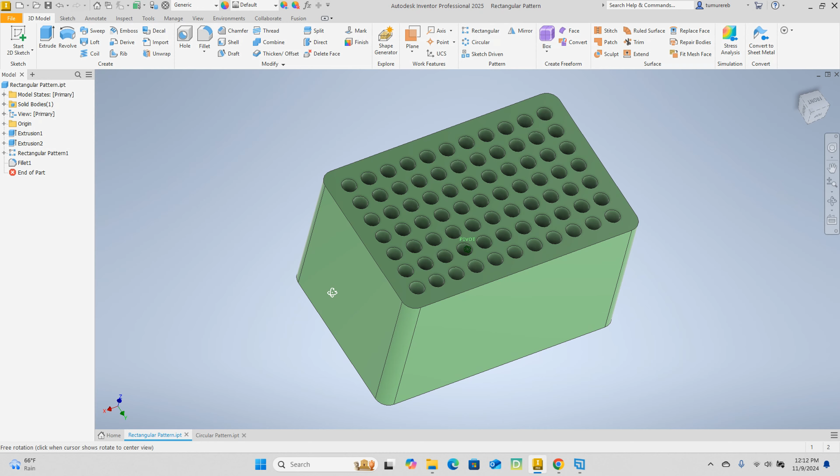In this exercise, we are exploring the applications of Extrude and Pattern Commands in Autodesk Inventor by creating this simple pencil holder. The tutorial is designed for beginners and I will go as slowly as possible to make it easy to follow along. If you are an advanced user, feel free to pause the video and try making the pencil holder on your own.

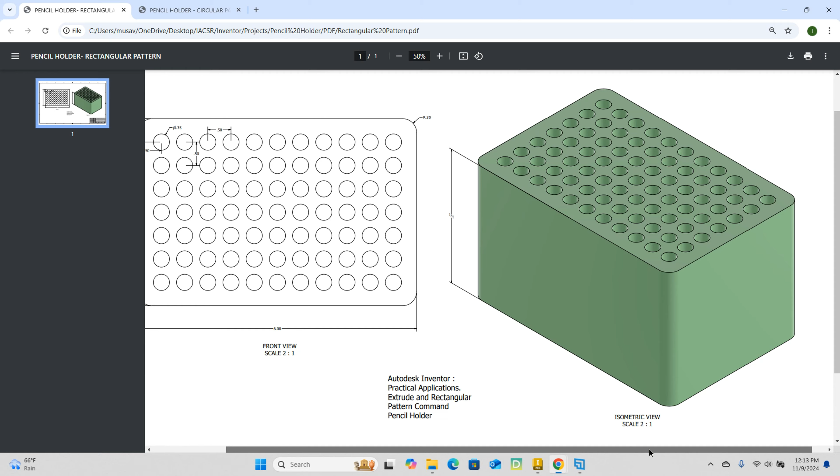Otherwise, follow along with me step by step. These are the dimensions. Later in the course, I will show you how to create these 2D drawings. Zoom in a little bit. Alright, go ahead and take a picture and try to make this on your own.

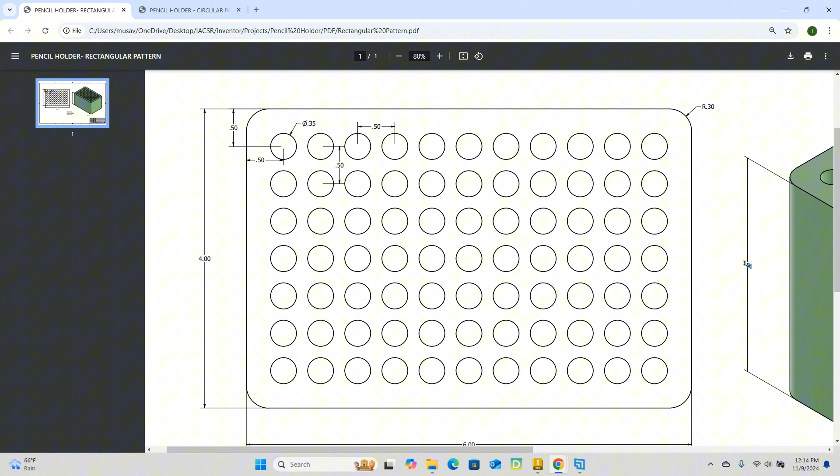As you can see, the length of this pencil holder is going to be 6 inches and the width is 4 inches. And then we have these round edges, and the radius for that is 0.3 inches. Overall height is 1.5 inches. Alright, now let's go ahead and get started.

Go to File, select New. We're going to be working in inches, so go ahead, expand this and just select English, Standard, IPT, and then Create.

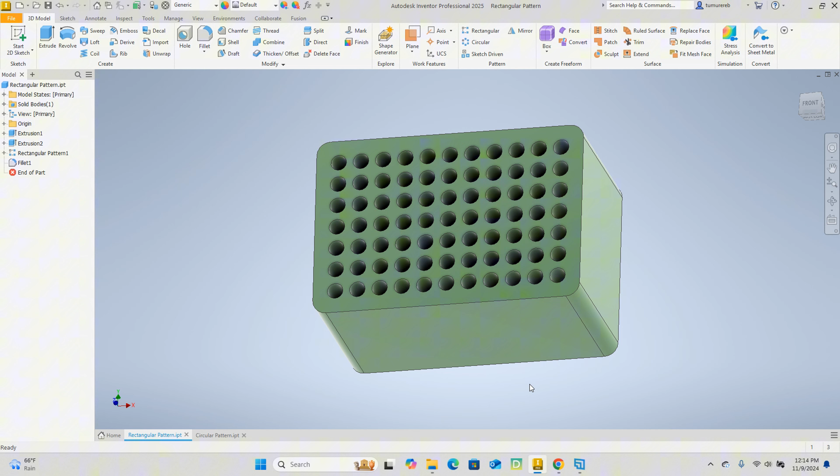Start a 2D sketch. Which plane do we want to use? Does it really matter? Go ahead, start with the XZ plane right now.

We're gonna go to the rectangle command, 2-point center. The origin is where the X and Y coordinates are 0. So just left click and move to your right or your left.

Now we need to put in the dimensions. The width is going to be 4 inches. So whatever that highlighted text is, go ahead and enter 4, then hit the tab key to go to the other side, and that side is going to be 6 inches. Enter.

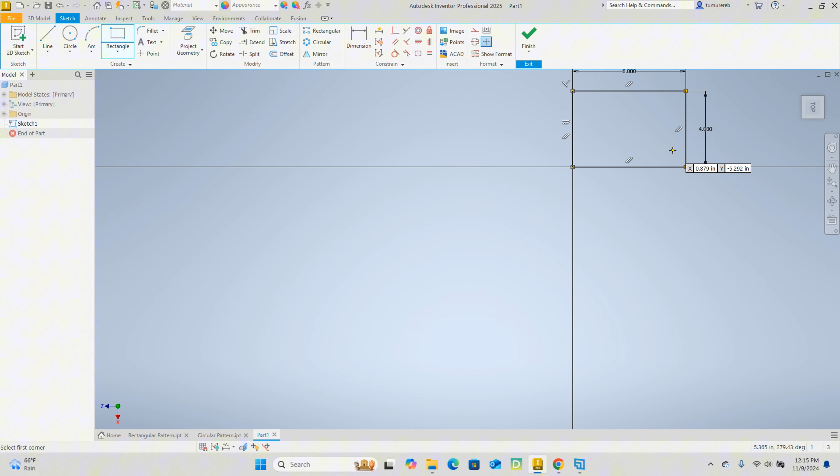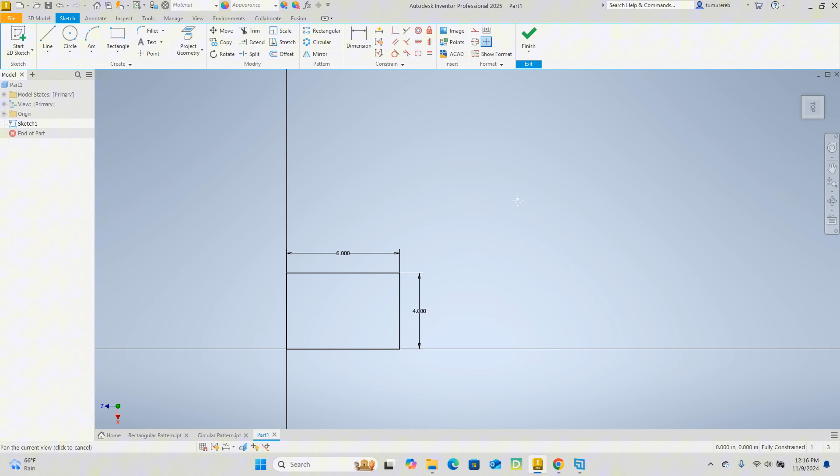Alright, now right click and click OK to exit the rectangle command. If you press and hold your wheel button, you get a pan mode that allows you to move anywhere you want on the screen so you have more room to work with. If you drag back and forth with your wheel button, you can zoom in and zoom out.

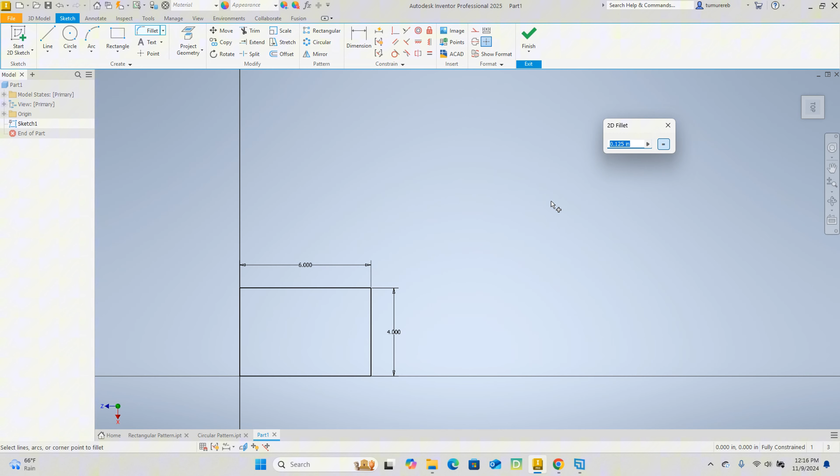Okay, now launch the fillet command. What's the radius? 0.3. Now go ahead, select this side, this, and that. Make sure each corner is rounded. Right click, again click OK, or press the escape key on your keyboard.

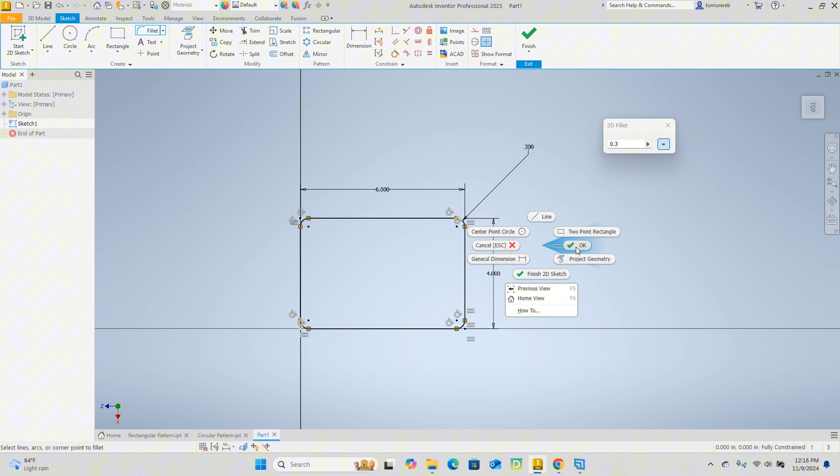Does the same thing. Finish your sketch, top right corner. Move down a little, press your wheel button and hold and move down. Now we are ready to extrude it. Extrude is the first command in the 3D model.

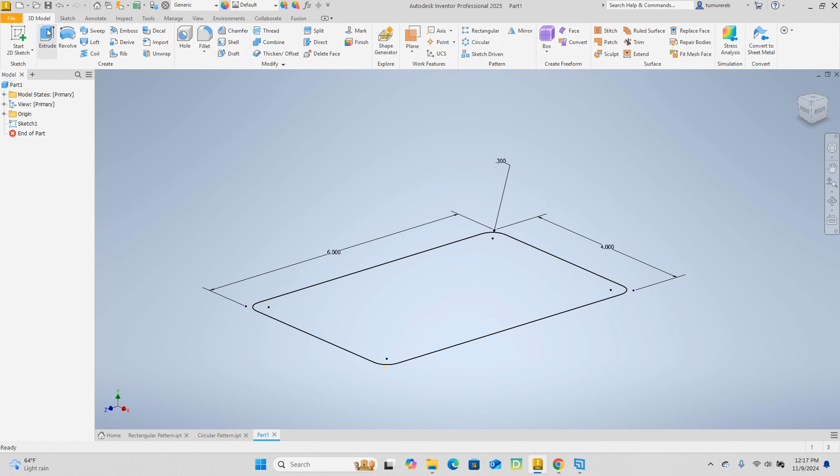That's probably the most used command in Autodesk Inventor. So extrude, launch the command. What is the height? The height of our pencil holder is going to be 3.5. And click OK.

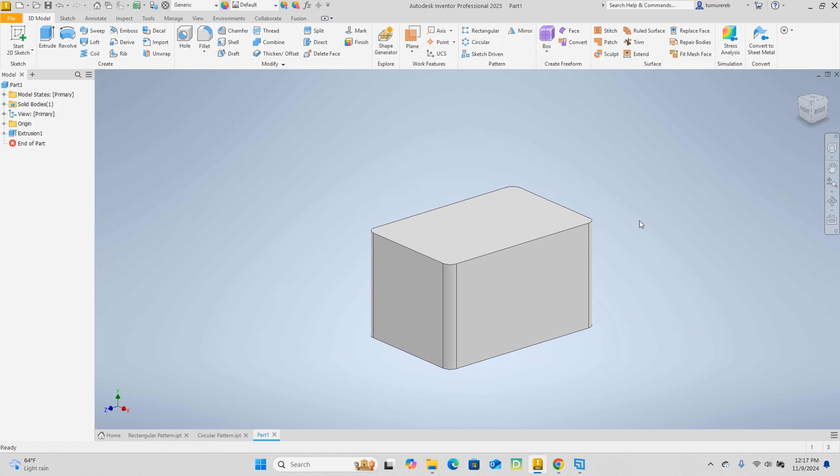Alright, so now select this top face. When you do that, Autodesk Inventor gives you multiple options. One of them says Edit Extrude. Let's say we made a mistake and we entered a wrong height. Let's say it was supposed to be 5.

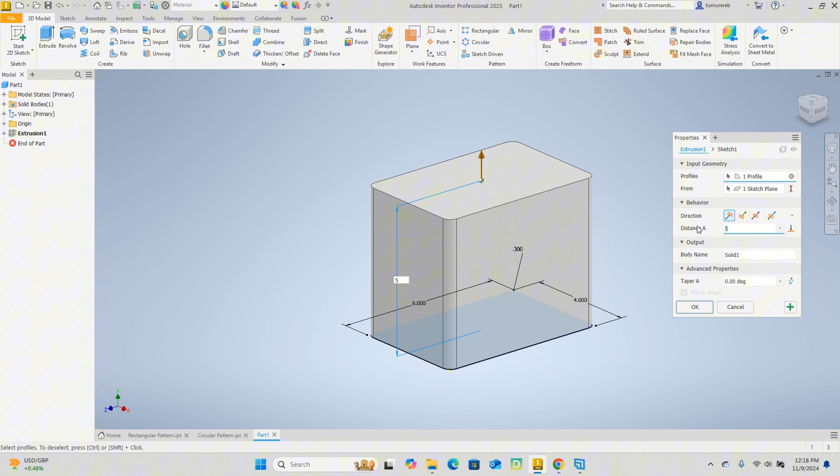You don't have to start over. You can just edit the extrude and change it to 5. See how it changes to 5 now? Alright, I'm just gonna keep it back to what it was. I want to show you that in case you made a mistake, you don't have to start over from scratch. You can just edit your extrude.

You can also edit your sketch if your dimensions change. If you're making this part for somebody and they say, hey, I want the width to be 4 inches and the length I want it to be 8, you can just change that to 8 and you don't have to start a new drawing.

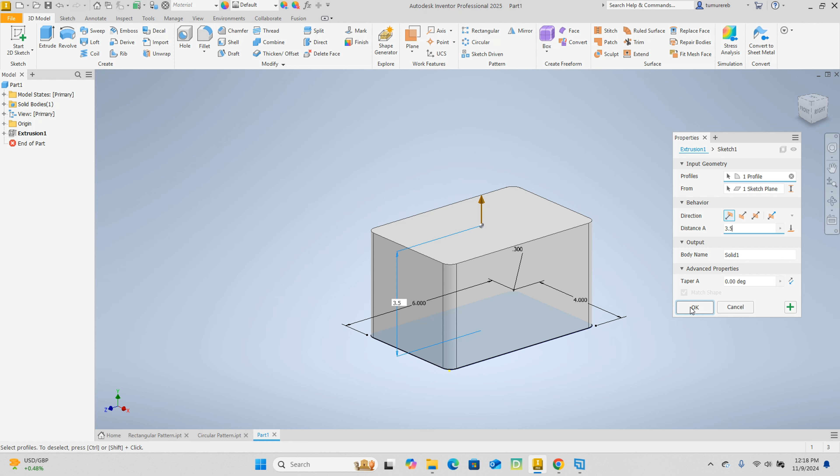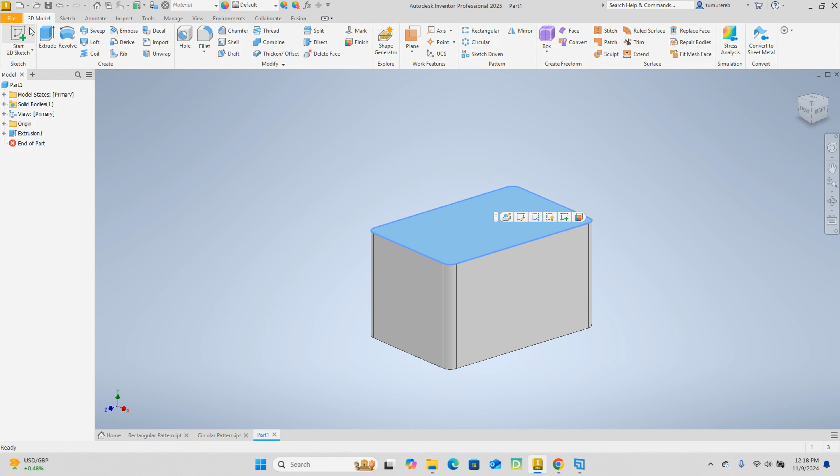Okay, so go back, left click, and this time we're going to look at the second-to-last option that says Create Sketch. This is going to allow you to create a sketch on top of this face. You can also go to 2D sketch and it will do the same thing.

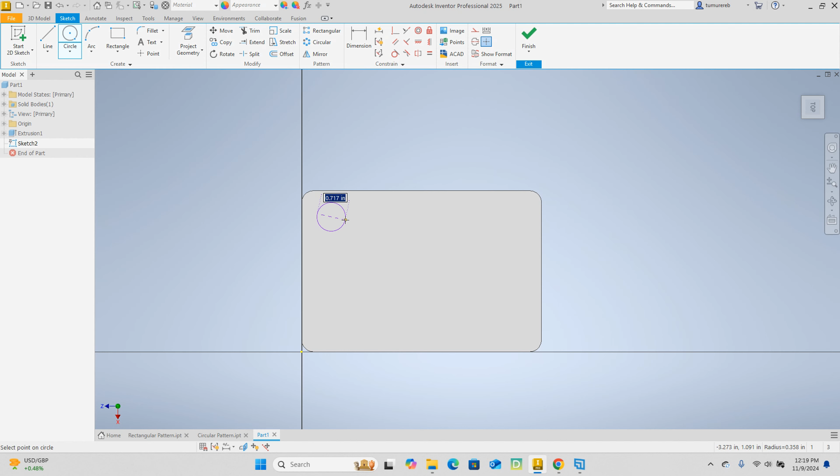It's just a matter of preference. One is faster, definitely, sometimes when time matters. Alright, so now we're going to select the circle command, and we're gonna draw another circle about this point. What's the diameter of this circle? Let's do 0.35, and that's going to be the hole for the pencil.

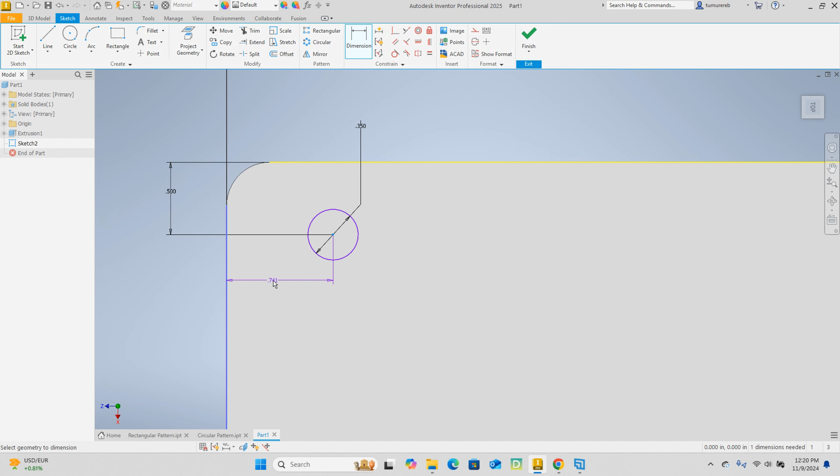Alright, we need the distance from the center of this to this edge to be 0.5. We also need this distance to here to be the same, 0.5. Alright, finish your sketch.

Extrude. Alright, now do we want to cut or do we want to join? Second option, cut. What's the distance? Let's do 3 inches.

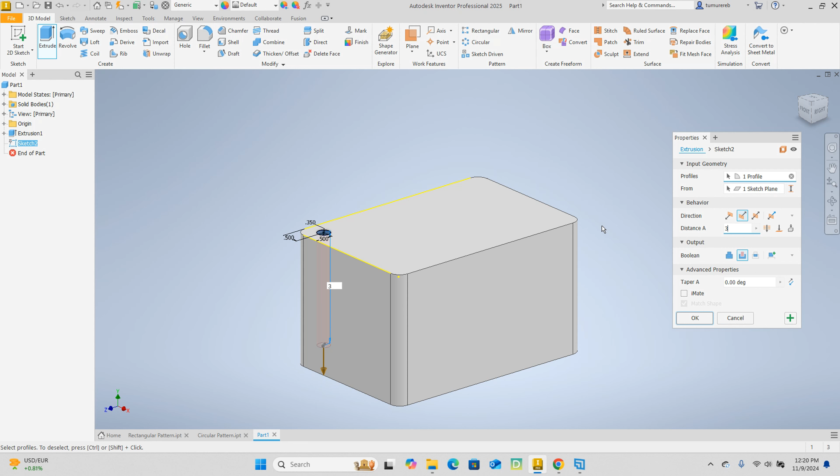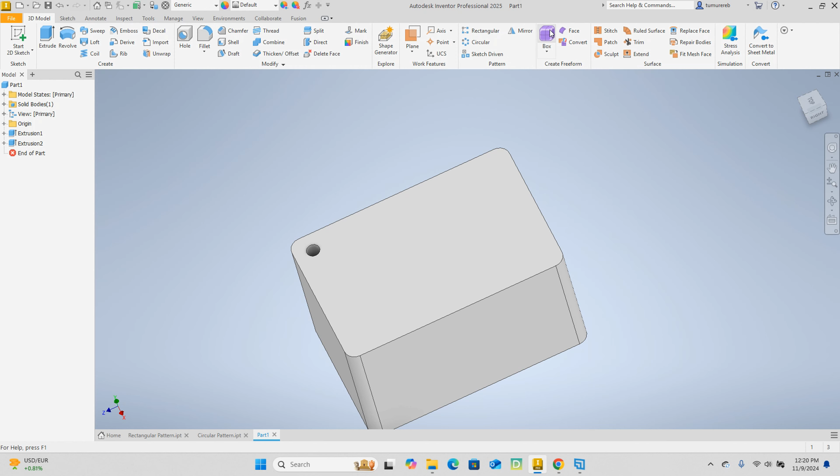Alright, so we got one pencil hole. Now we need to make multiple copies, and to do that, let's use our rectangular pattern. Rectangular pattern is next to the left of this purple box in the pattern panel.

So when you launch the command, the first thing it's going to ask you is to select the feature. The feature is going to be extrusion number 2. Notice now that it's highlighted, that means we selected it, and the arrow went from red to white.

Now we need to give a direction. So select direction 1, select that arrow, and then go ahead and select this edge. It gives you a preview of what it's going to look like. We don't want it going this side, so we want it to flip over.

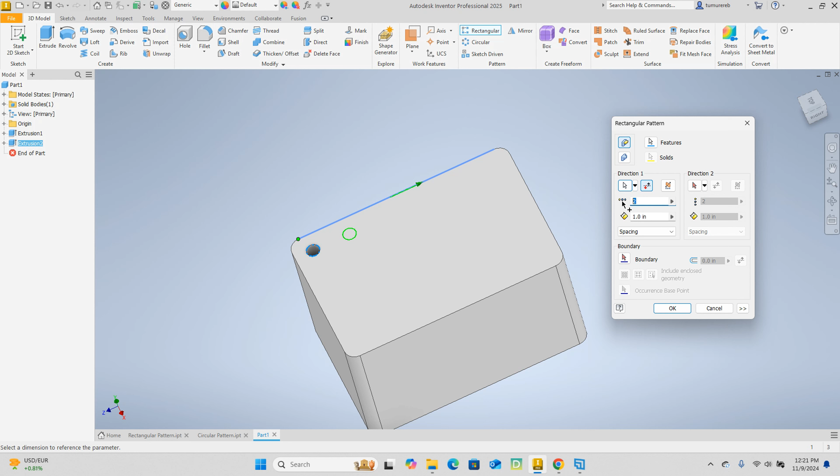And how many do we need? Let's do 11 of them. It gives you a nice preview. What's the space between them? 0.5 is fine. Alright, so that's done.

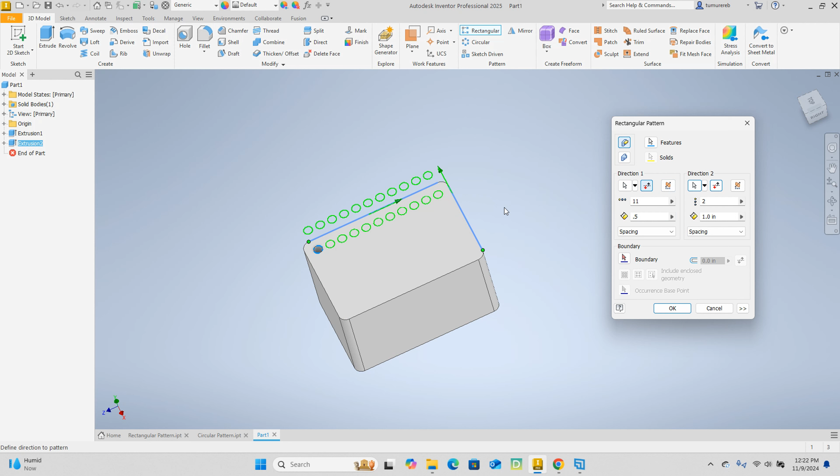So we're gonna make multiple rows over. Move to direction 2. Select this edge, flip it. How many? 7. Inventor is like, hey, you may crash your computer. This is too many—if you do like 1,000, definitely you'll crash it. So go ahead and do 7, that's fine. Just click OK.

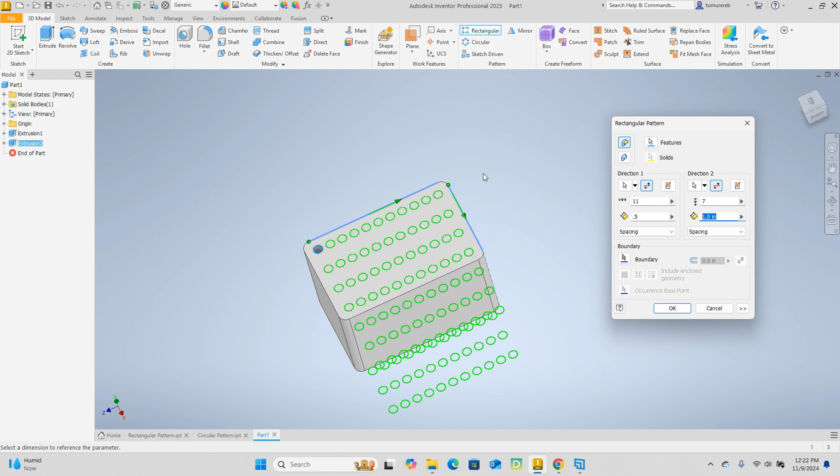Space between them is what? 0.5. And that's a nice preview of how it's gonna look. So click OK.

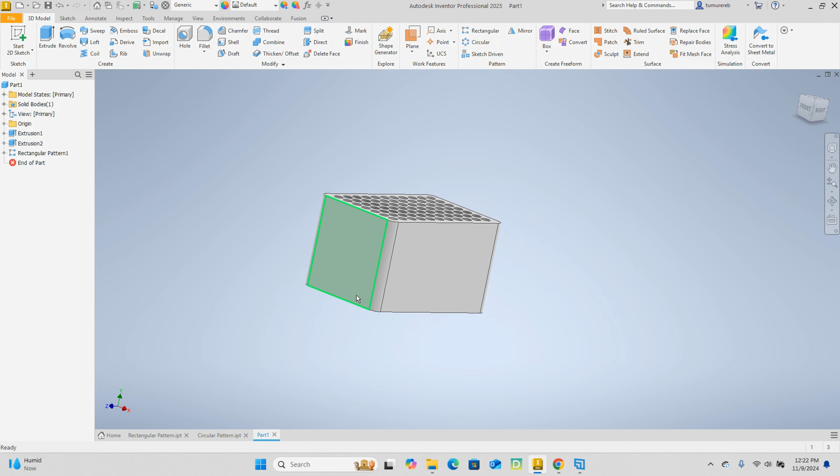Alright, we are almost done. The last thing we need to do, let's go ahead and make it look pretty. Change the appearance—show your creativity.

Alright, so we're gonna go to the top, whatever that default is, under that drop down. We have a list of different materials we can choose from. I am in the Inventor material library. That is also Autodesk appearance library—so many options.

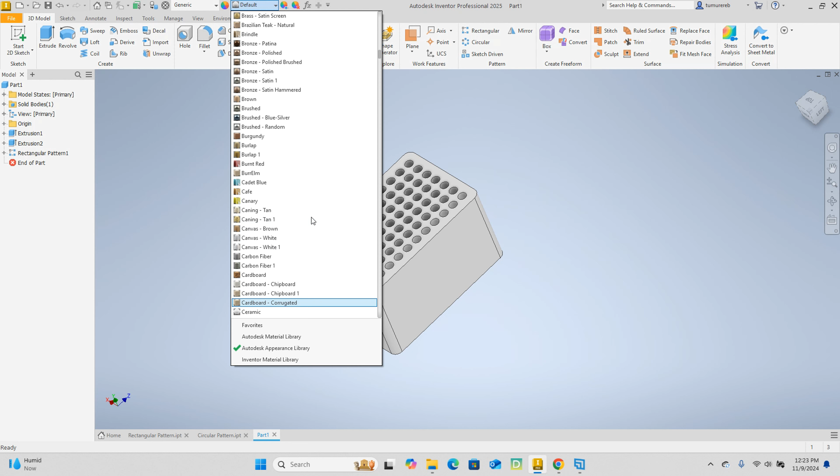Go ahead and just play with it, find whichever material or color that you want to use. It's entirely up to you. I'm gonna find dark green here. Alright, that looks good.

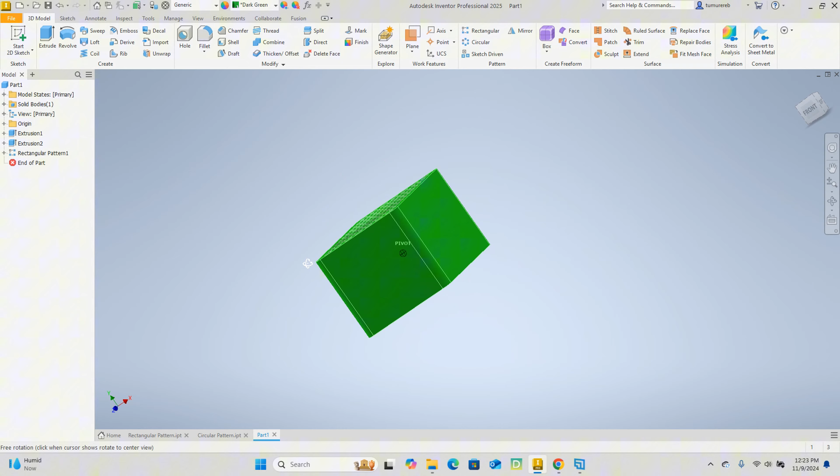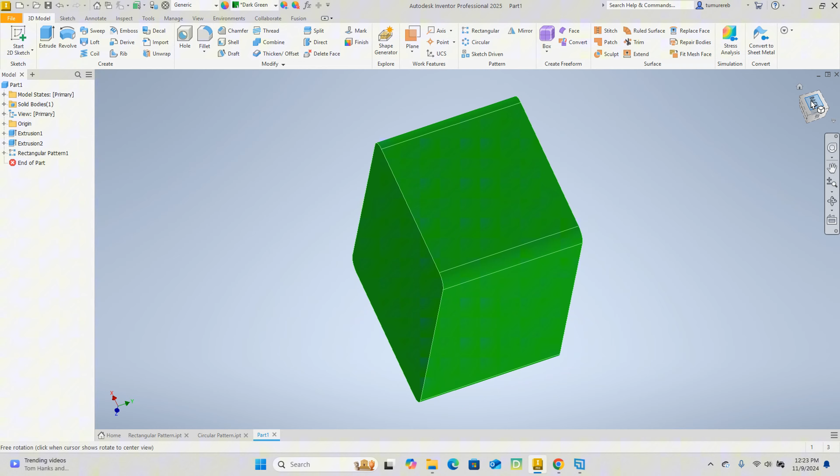Shift and the wheel button is going to allow you to rotate like this—you're gonna see different views. If you don't want to do that, go ahead and use the view cube. You can use this view cube to see different sides, like the bottom or the back. It does the same thing, but I prefer shift and wheel button—it's fast, especially when you have multiple parts. And remember, if you press and hold, you can just move your part anywhere you want.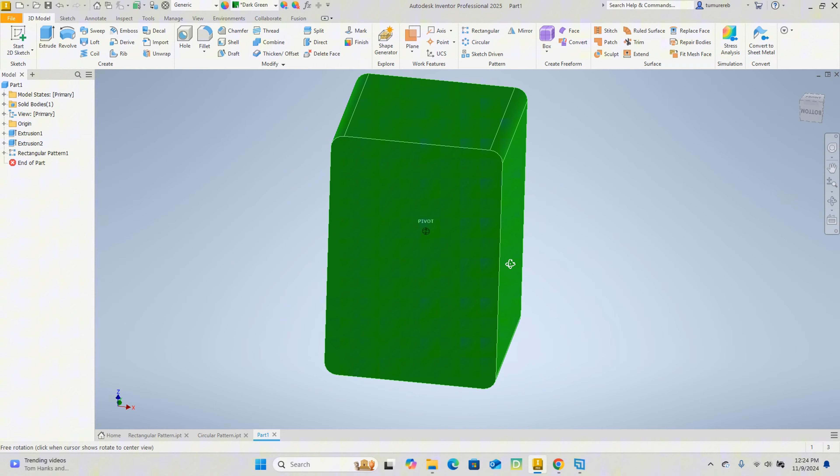Green. Alright. Concludes—actually, one more thing.

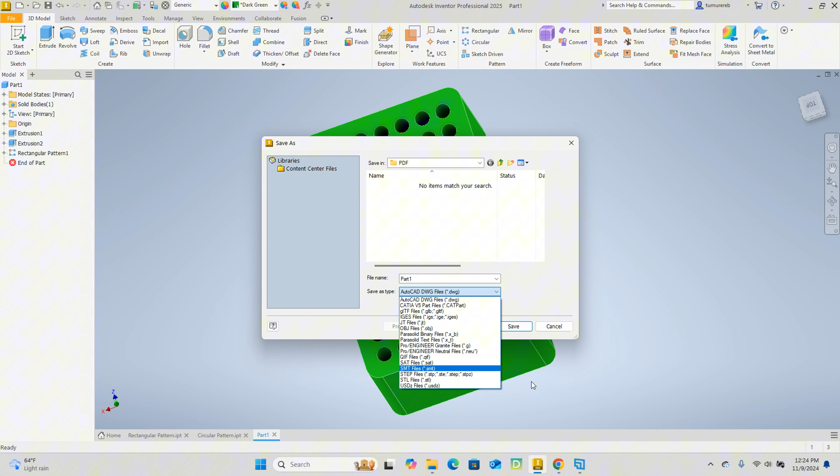So let's say you would like to print this for your friend or your favorite teacher. Let me show you how you can export the file for 3D printing. You're gonna go to File, Export, CAD Format, and we need the file type to be STL file. Most 3D printers accept, most 3D printer slicers accept STL files. So you're gonna go to your 3D printer slicer and build it. Make sure you select STL file if you want to print it.

Okay, I'm gonna cancel that. Alright, that concludes exercise 1, part A, extrude and pattern commands.

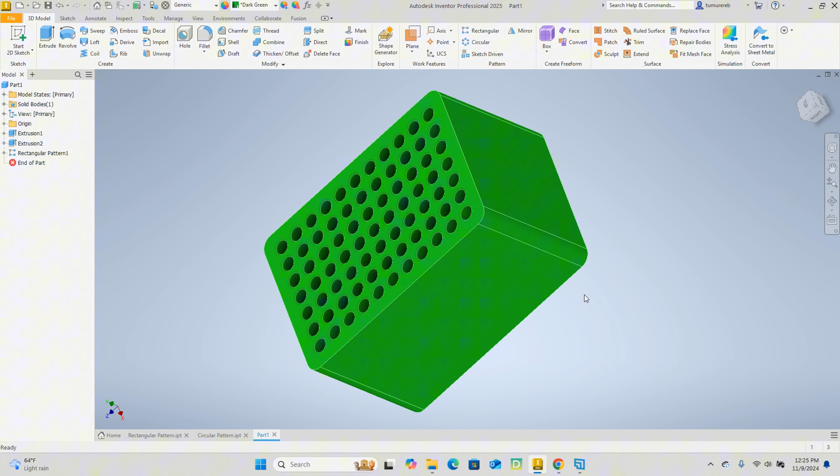Part B, we are going to look at this guy. It's another pencil holder, you guessed it right. But instead of using a rectangular pattern, we are going to use a circular pattern.

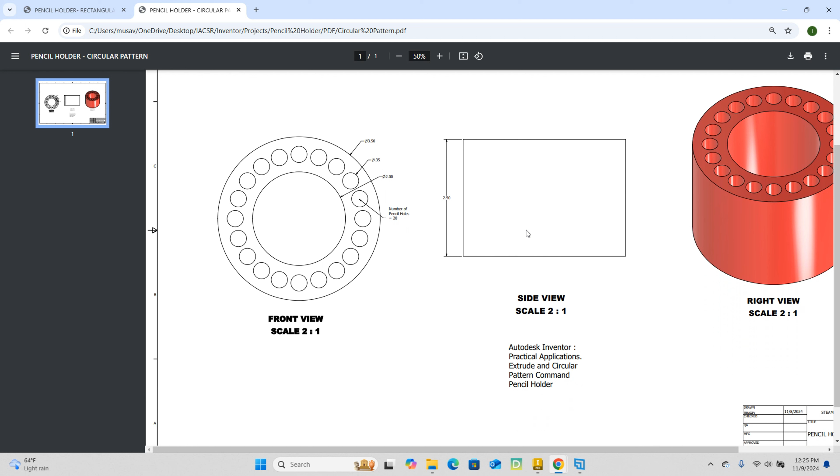Here are the dimensions. If you want to try it on your own, here are the dimensions. And I will show you later how to create these 2D drawings.

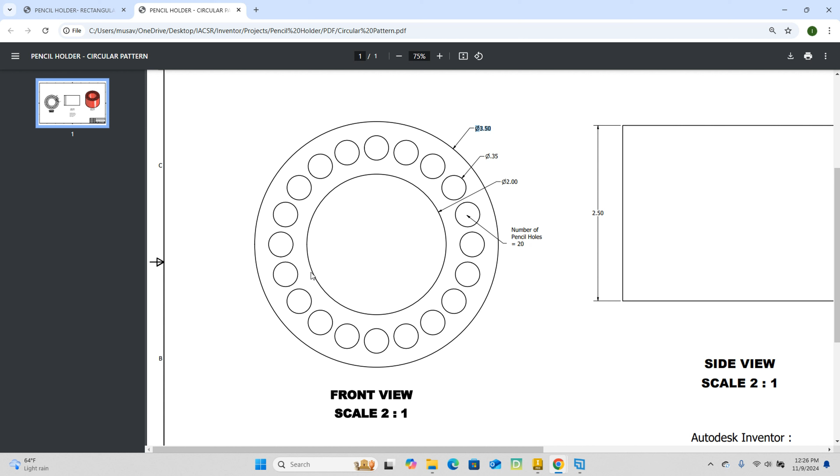Zoom in so you can see better. So what we're looking at, this outside circle is 3.5 inch diameter, and the diameter of this one is 2 inches. The overall height of the pencil holder is 2.5. And we need to create 20 holes.

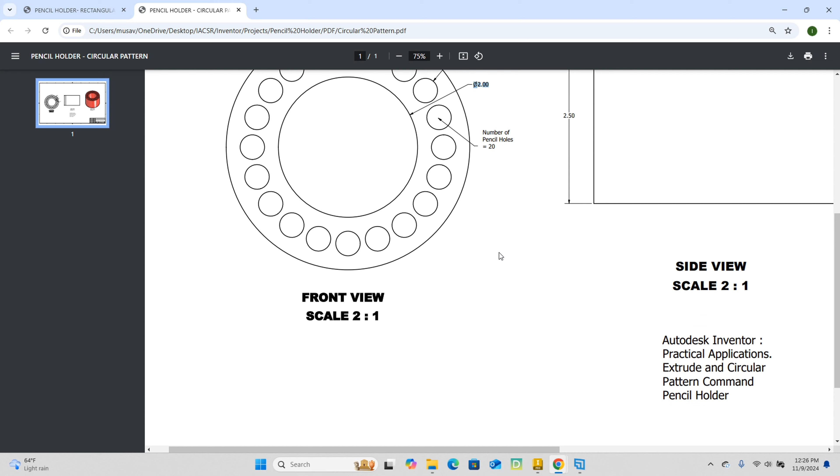Go ahead and see if you can make it on your own. If you can't, that's totally fine—we can do it together.

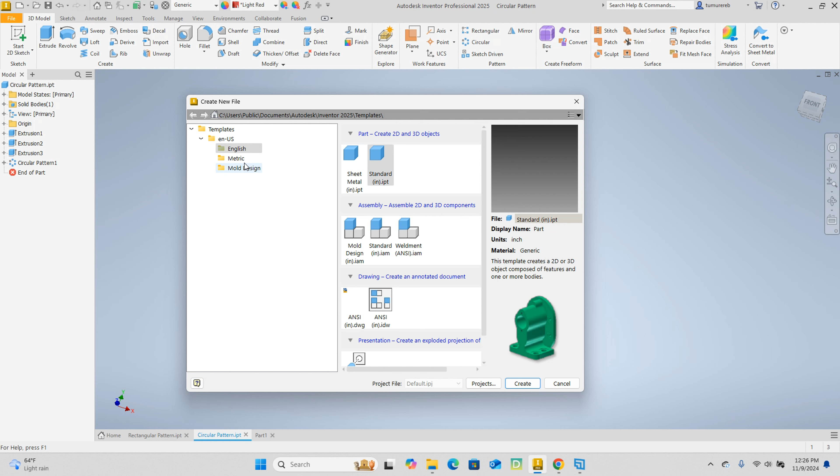Let's jump back into Autodesk Inventor. Alright, so like we did before, we're gonna go to File, select New. We are still in English, and standard.ipt, create, start a 2D sketch, XZ plane, circle command, left click, and then just circle command. The diameter is going to be 3.5 inches.

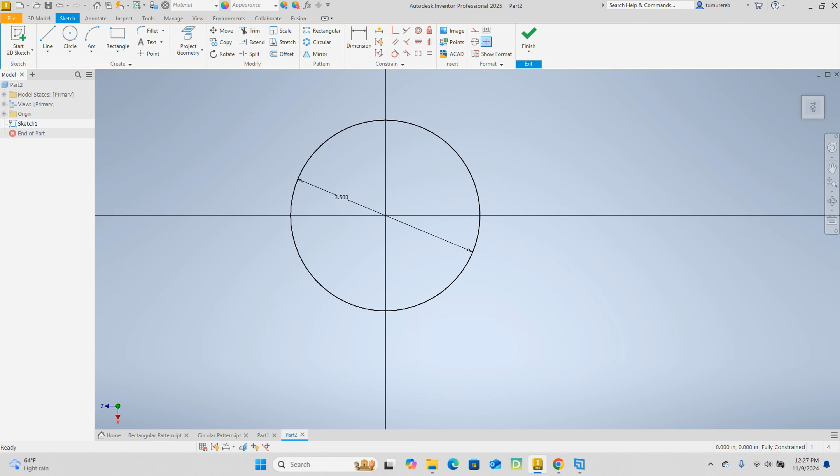Finish your sketch and extrude. How much do we need to extrude it? The height was 2.5 inches. 2.5 inches, awesome.

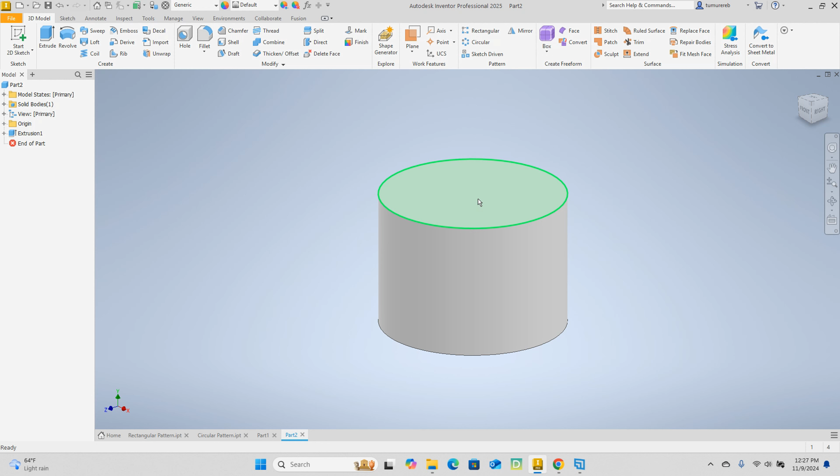Again, select this top side. What do we want to do? Do we want to edit a sketch? Nope, we want to start another sketch on it. Just create a sketch. Go back to circle command.

What's the diameter? 2 inches. Right click or escape key, and top right corner green check, finish your sketch.

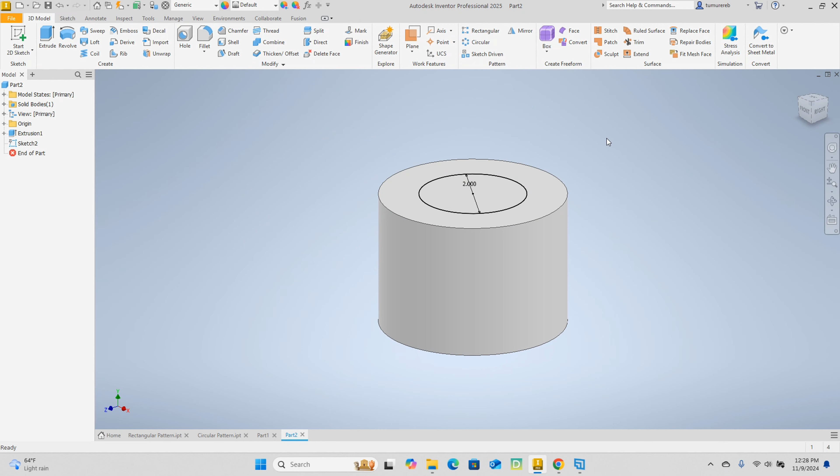Extrude again. Do we want to cut or do we want to join? Cut it. How much? What's the distance? Let's do 2 inches, 2 inches is absolutely fine. Okay, alright, now select top face again.

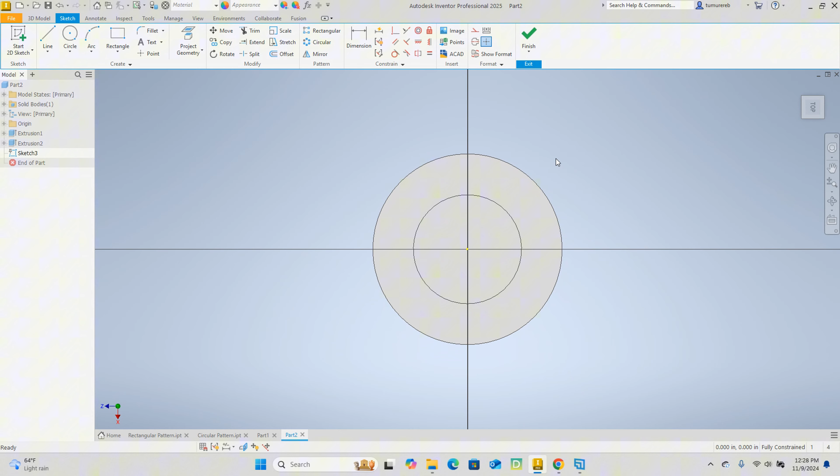Start another 2D sketch on it. Go to line command. Draw a line from here to this side. Right click, okay. Select that line, left click to select it.

Then right click, select center line, so I'm going to make it a center line. Okay, I'll go back to circle command. Find the midpoint. The midpoint of this line is going to be that green dot.

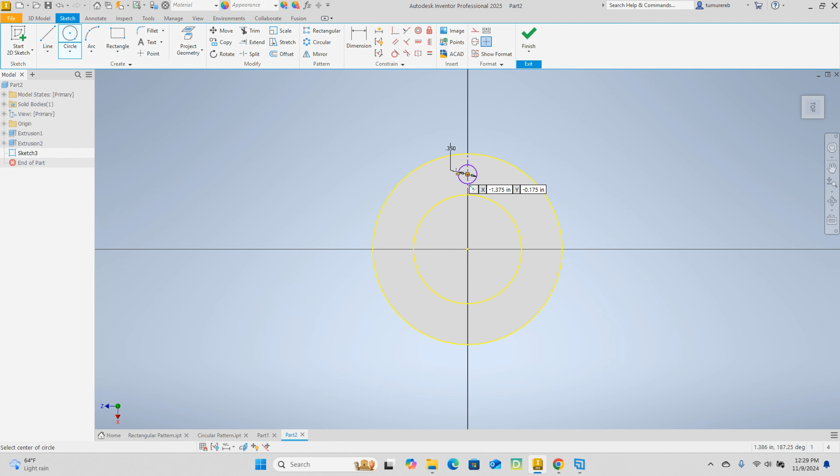So the diameter of this circle is going to be what? I hit 0.35. 0.35, awesome. Finish your sketch.

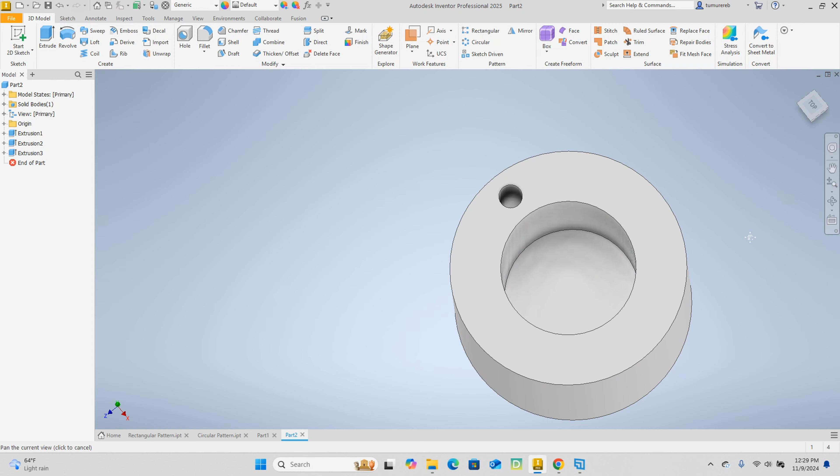Extrude one more time. Extrude this circle. Select the circle. Do we want to cut it? Yes. How much? 2 inches is okay. Click OK. Alright, now we got one pencil hole in there.

How can we create multiple holes at the same time? Circular pattern. The feature is, look, when you launch the command, the arrows are red. Anytime these arrows are red, that means the command won't work. So we have to make sure we give all the inputs it needs for the command to work. The first one is the feature we want to copy, so just select extrusion number 3.

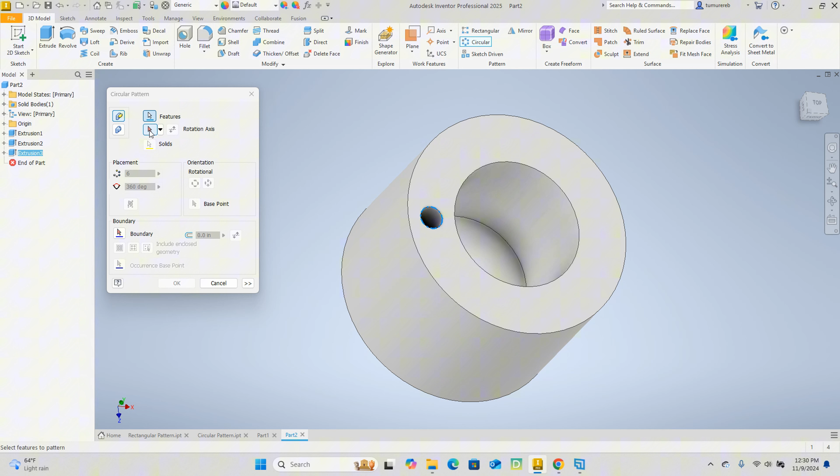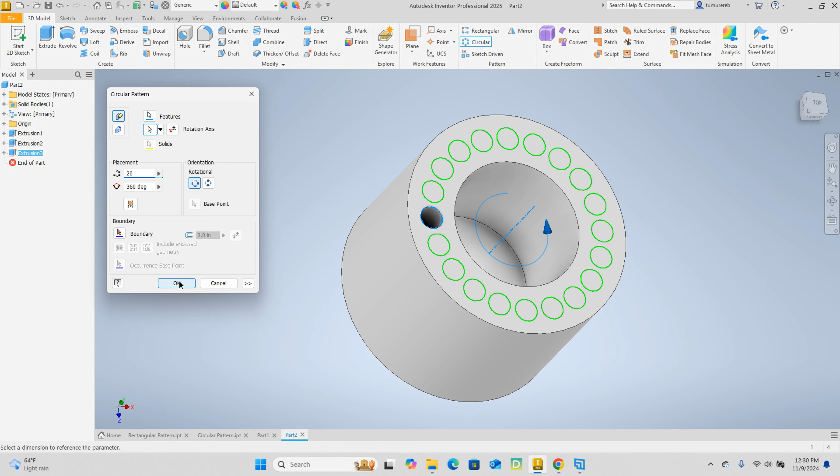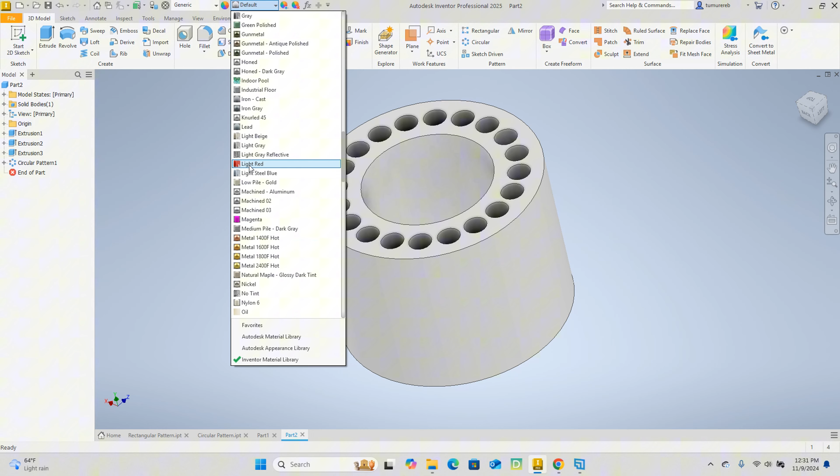We are almost done. Here's where you get to show your creativity. Again, go to the top and select your material of preference. Try all these different libraries and see what they have. I'm going to select light red right now, but feel free to try multiple and see. Maybe you want this part to be paper, who knows? Hey, experiment with it.

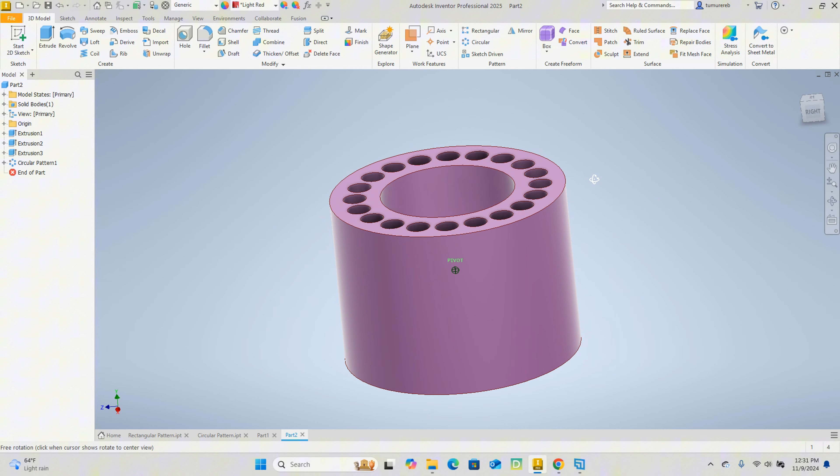So that concludes exercise 1 part B. Two circular patterns, two pencil holders, one with a circular pattern, another one with a rectangular pattern. You can 3D print them, use them for yourself, or give them to your favorite teachers or your friends.

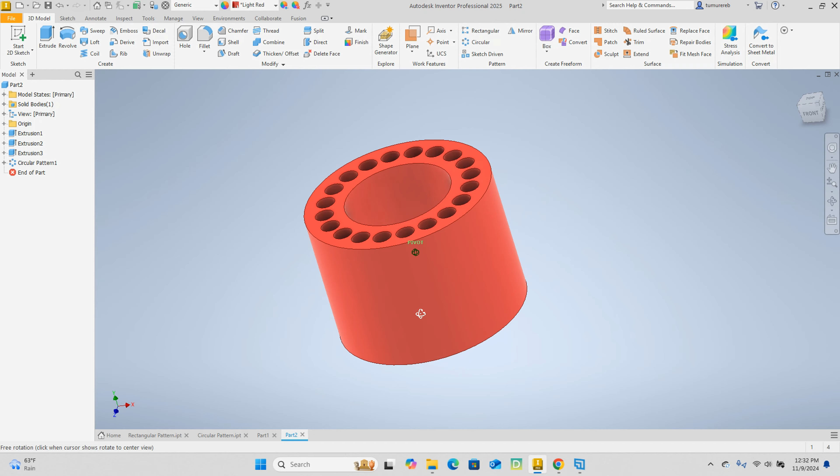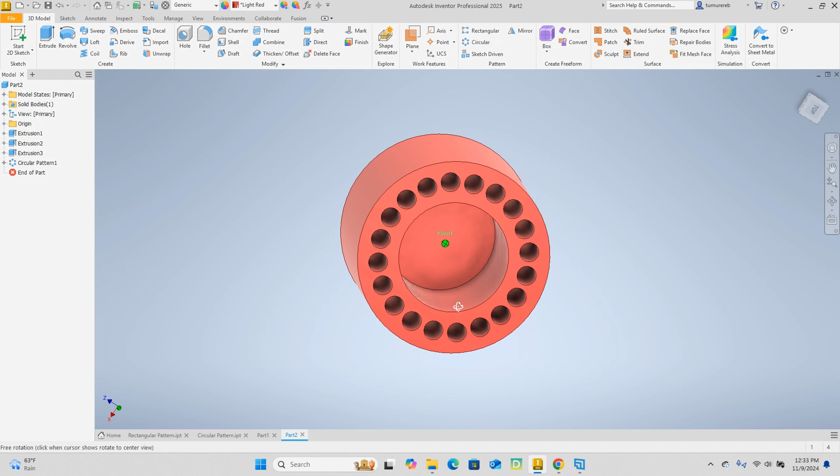So for your homework, what I want you to do is look around your house and come up with something, or just around you. It doesn't necessarily have to be at your house, but think of something we can make using what we just learned.

Rectangular pattern, circular pattern, and extrude, okay? Think about extrude, that was the first command.